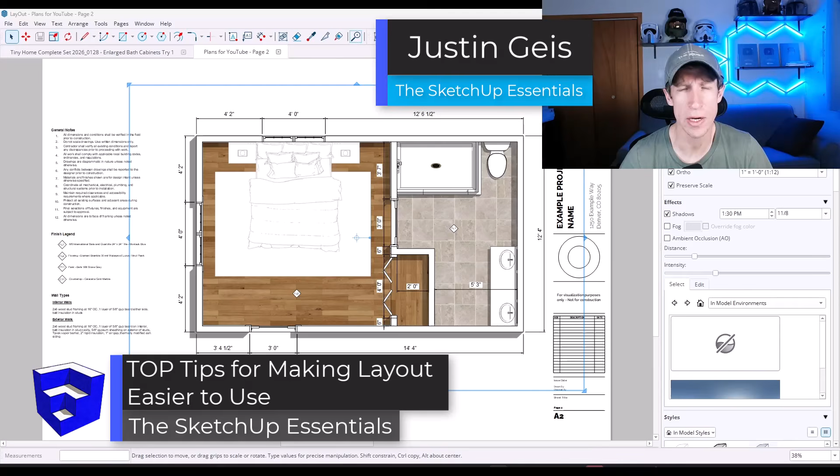So in today's video, we're going to talk through 10 tips that can make working in layout much easier. Let's go ahead and just jump into it. First off, I apologize if I sound a little bad today. I'm a little bit under the weather, but not bad enough to not make this video. So let's go ahead and get started.

Tip number one when you're working in layout is I highly recommend that you lock your viewport layers. What that means is you should be organizing all of your stuff in the model by putting it on different layers, and you should have them set up where you can toggle those things on and off. So I've got my dimensions on a layer, I've got my title block on a layer, and I've got my viewports on a layer.

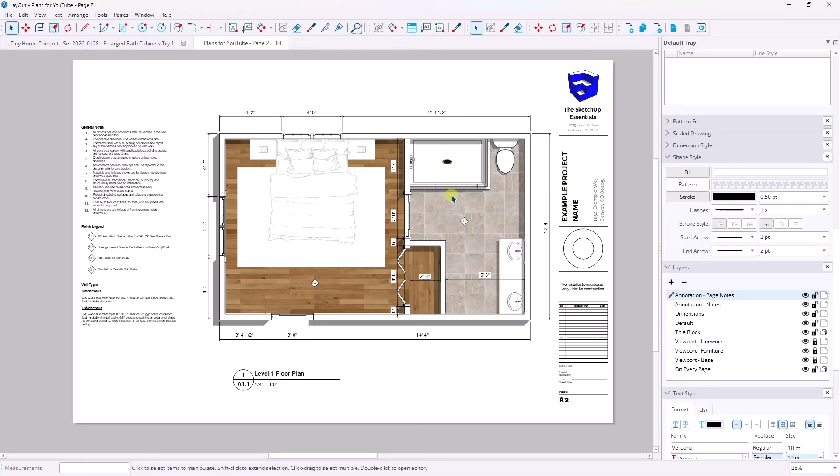In this case, I have multiple layers, but one of the things that I find frustrating is it's really easy to accidentally pick up a layer and move it around, which can mess up the alignment of your whole plan set. So what I like to do is make sure my viewport is set on a layer and then click on the lock button when I'm not using it. Now that it's locked, I can't accidentally pick this up and move it around because these are on a layer that's locked and you can't edit them anymore. So I highly recommend locking those layers once you get them set up so that your plans aren't moving around.

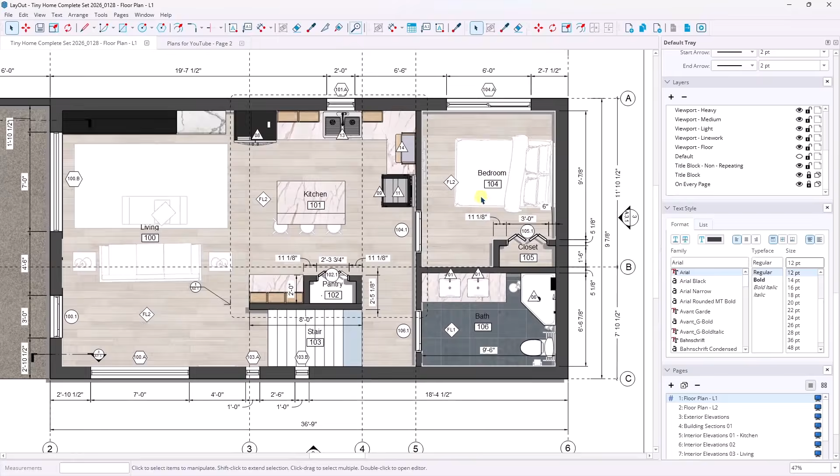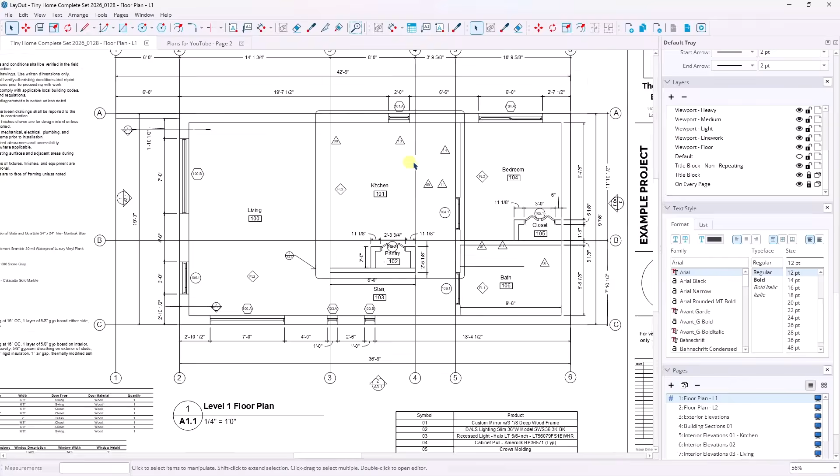Tip 2 is your plans can get really slow moving around in your viewport, especially if you have a whole bunch of stuff in them. So one of the things I recommend is if you go up into Window, Preferences, under Performance, there's an option for Draft Mode. What that's going to do is take your SketchUp model, and I'm going to leave it on always on. You could do it on pan and zoom as well. But always on is basically going to take your model and only display the vector edges and other lightweight things in your model. So notice how now, if I'm doing things like dimensioning, it's only showing my lines and edges in here, and it's doing it in a really fast, responsive way.

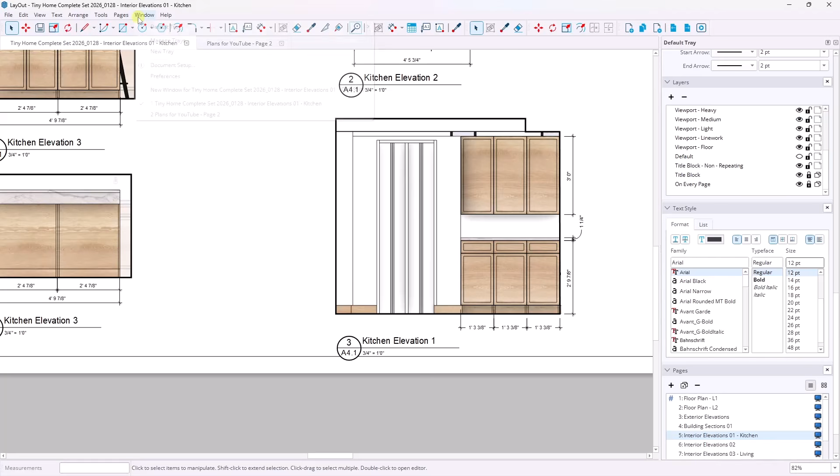You can also go into the settings under preferences and set this where it's pan and zoom only. Instead of trying to redraw over and over again, this is going to have a little bit of a pause before it redraws things in your viewport. That means you can move around in here without having that slow redrawing over and over again, especially if you have a heavy model. So draft mode is a fast, easy way to speed up your performance when you're inside of layout in order to do things like add dimensions without having to sit and wait for the engine to speed up.

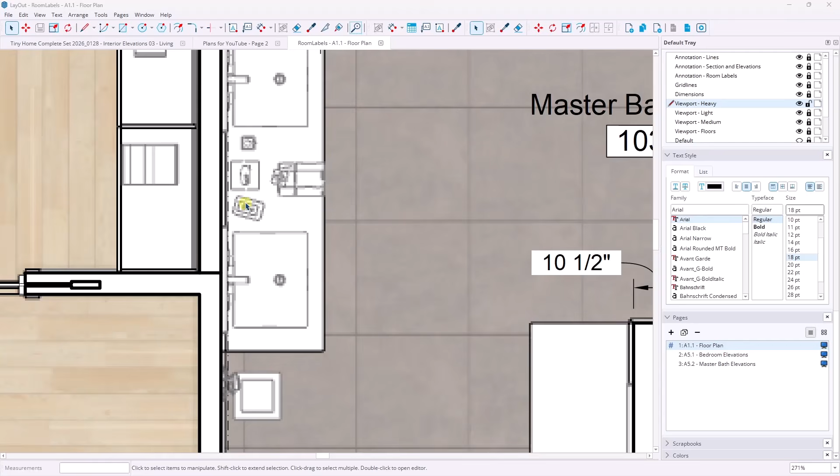Tip 3 is actually a reminder, something I forgot about for a while as well. When you export your drawings, your raster viewports are going to show up better in the export than they do in your layout viewport. For example, I've got some accessories on the table in this plan set, but you can't really tell what they are in layout. If I zoom in, they're very pixelated, they don't look very good.

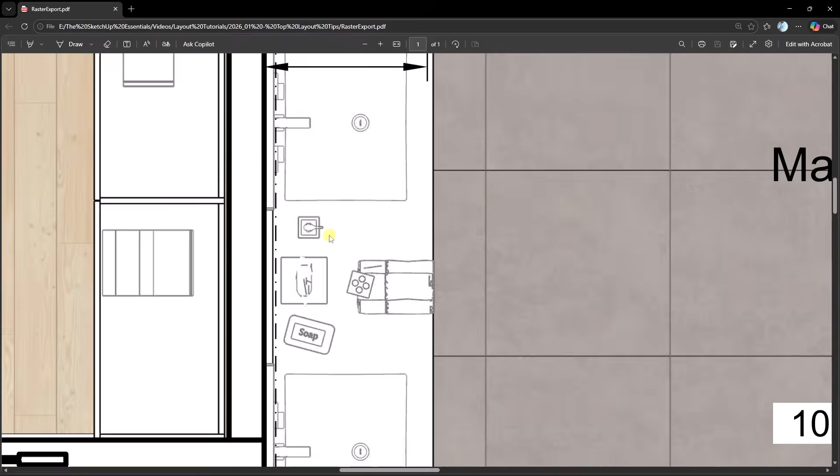However, I went ahead and exported this to a PDF, and notice how this line work actually came out fairly smooth. So just note that sometimes if something doesn't look good in layout, it doesn't mean it's not going to look good in your actual export. Try exporting it and see what your line work looks like on your raster items, because a lot of the time in the actual export, they're going to look better than what they show up as in layout.

Okay, and while we're on this page, this is something I talk about a lot in the course, so if you want instruction on how to actually do this, check out the Plan Essentials at SketchUpEssentials.com/PlanEssentials. One of the things I highly recommend is mixing a vector viewport with raster viewports.

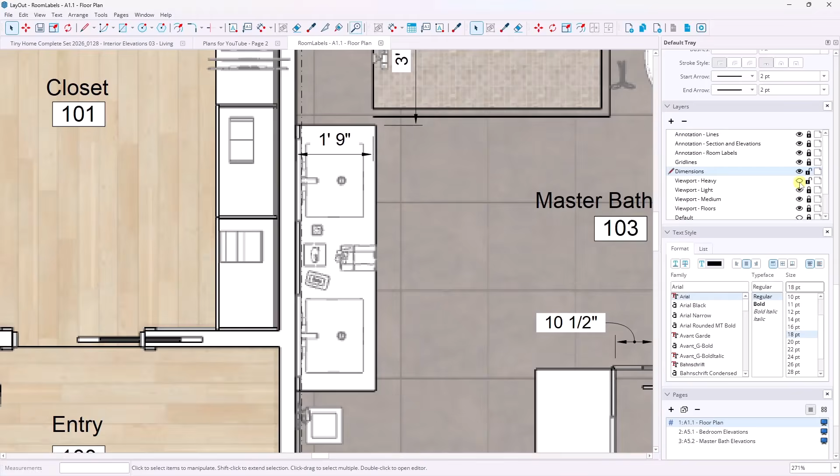In this case, what I've done is I've stacked a line work viewport on here that I can render as vector, and then I've got my other stuff in here as raster. That allows me to have this nice, crisp line work on things like the walls that need to be crisp for dimensioning and other things. But I've also got the other things in my model, and I can have heavier models in here without having to worry about the performance.

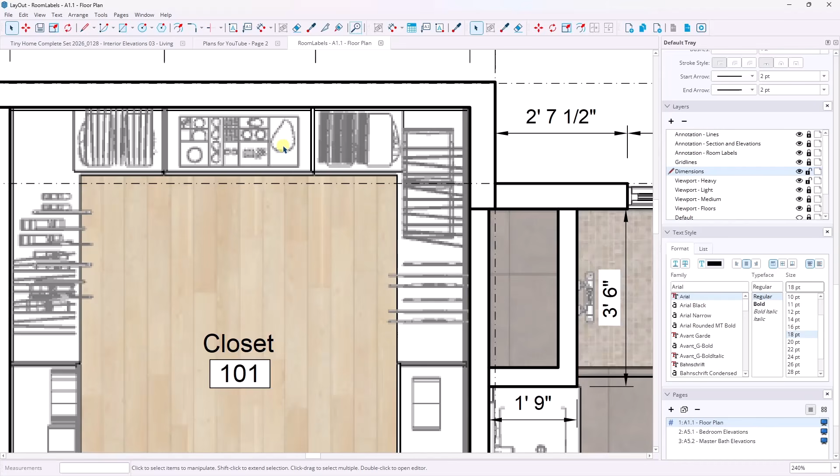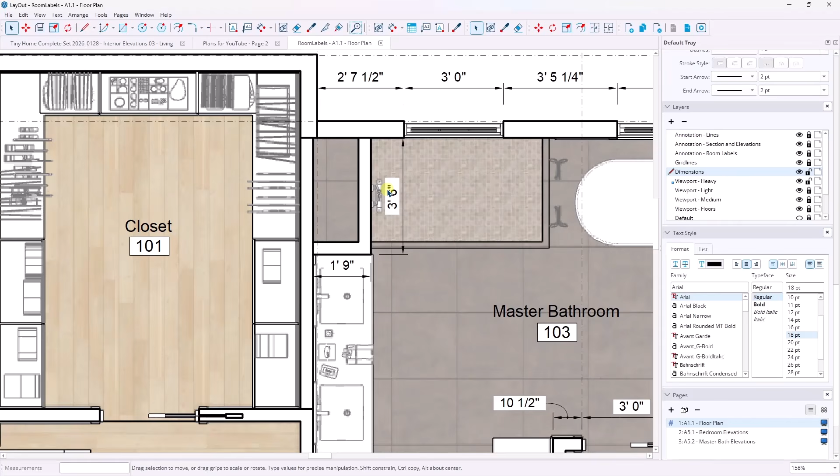Because if I was to take this geometry in here, like the stuff in the closet, and try to vector or hybrid render it, it would run so slow that it would take forever to run properly. So if you just render a lightweight line work layer and have everything else in here as raster, you're going to have significantly better performance than if you just tried to put everything on a hybrid layer or something like that.

Okay, next up is something I think was added in Layout 2025, I'm not 100% sure, but previously there was no move tool in the way we have a move tool in SketchUp. It didn't work the same way - what you would do is click and drag something, then you could tap the control key, but it was very click-and-drag oriented.

Well, now the move tool works the same way as the move tool in SketchUp. The cool thing is I can select an object, tap the M key, and that gives me an inference point. That inference point was hard to pick up previously, but now I can single click, move my mouse, tap the control key and click again. Then I can type in *3 and hit enter, and create an array exactly the same way I could in SketchUp. So it's now much easier to create equally spaced copies of objects inside of layout using the move function.

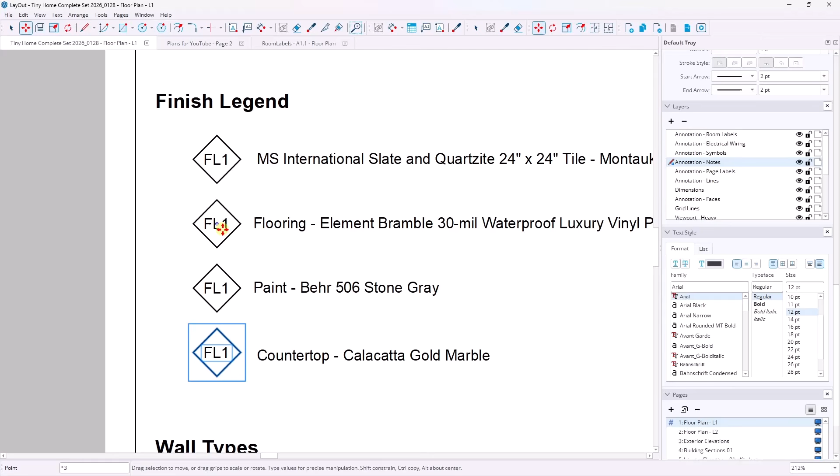Okay, so next up is using scrapbooks. Scrapbooks are basically a layout file that allows you to save things so you can drag them into future models later. This is literally just another layout file that you save in your scrapbooks folder, and then you have access to it inside of your plan set.

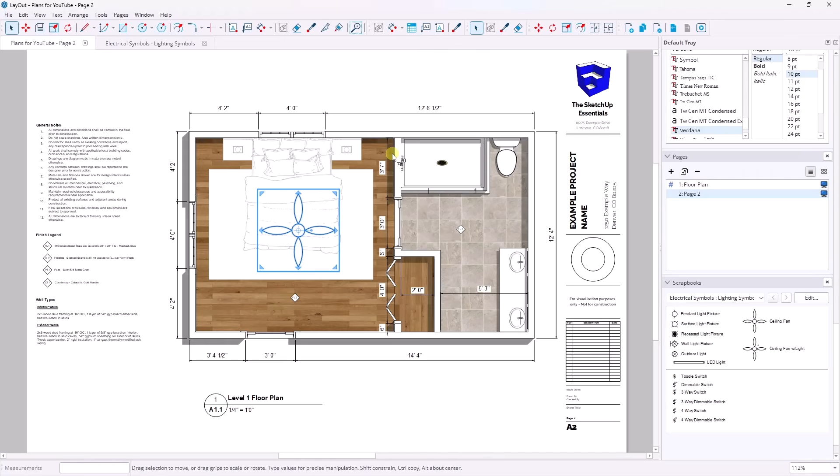So say I wanted to add a ceiling fan symbol in here - I can just click and drag it outside of that file, then resize it and place it where I need it to be. I've also got access to things like my pendant light fixtures, so I can just click and drag these onto my wall without having to redraw them over and over again. I highly recommend for any elements you're repeating over and over, including things like your notes, that you save them as a scrapbook so you have quick access to them later.

Okay, so next up, when you're creating tables, I would recommend, instead of creating your tables directly inside of layout, doing them inside of an Excel file. The reason is because Excel is much better for data entry - it allows you to create things like these schedules right here. Let's say we were to update the quantities in this schedule - Excel is way easier to use than table editing inside of layout.

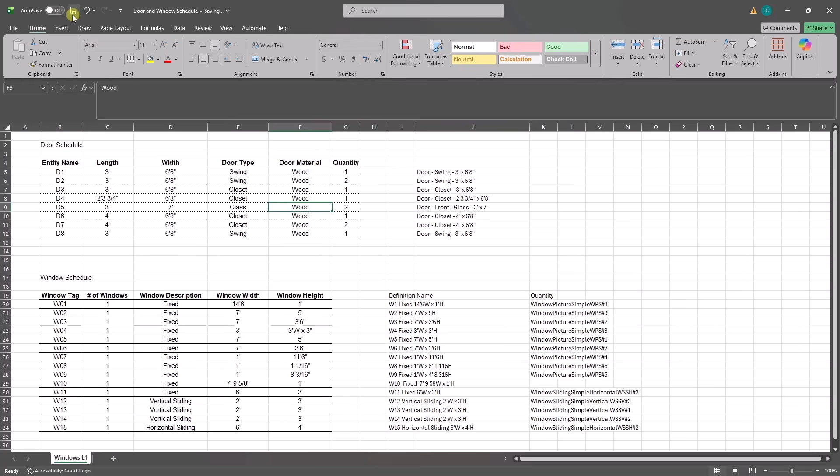And what you can do is insert a viewport that's linked back to this Excel file in the same way. For example, notice how if I update my table reference, it looks like it did it automatically, which will happen sometimes when the table is actually open.

Notice how your quantities will change whenever you update that model reference or table reference, the same way that you link back to a plan file in SketchUp. So I highly recommend that you use an Excel file for your schedules and then import that.

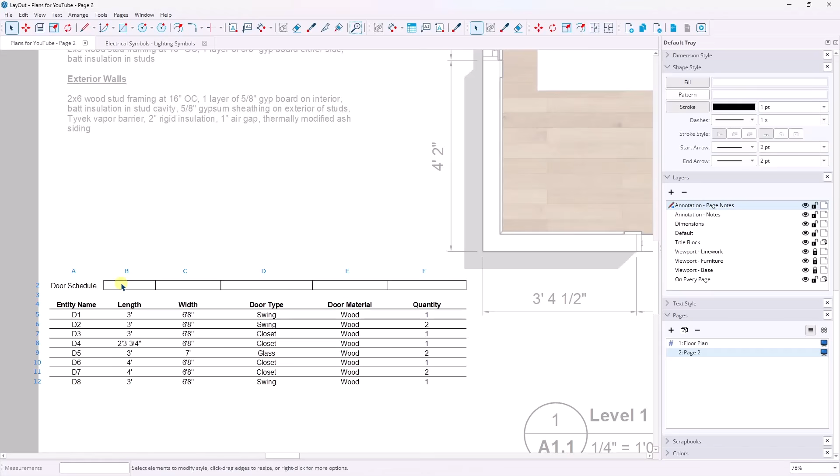You can edit things like these boxes right here, so you can edit the formatting in here. The text formatting and stuff will actually come over from Excel, so you can do a lot of that text formatting and the justification and things like that. Then you can use the shape style in order to adjust the stroke and add lines in here inside of Layout itself.

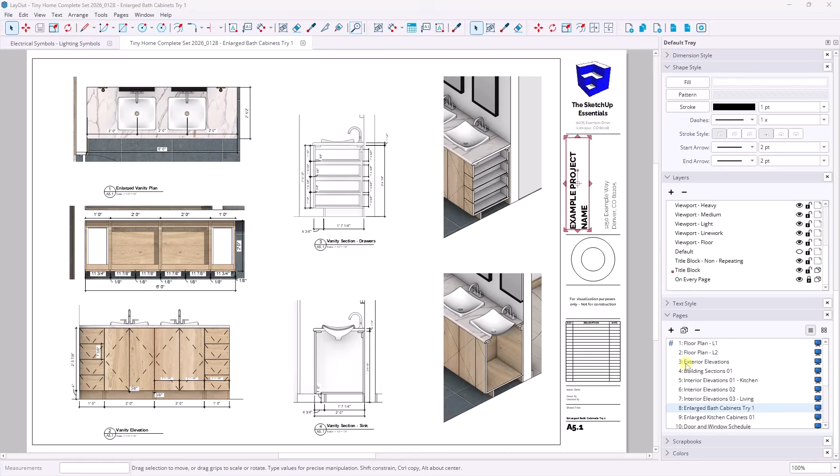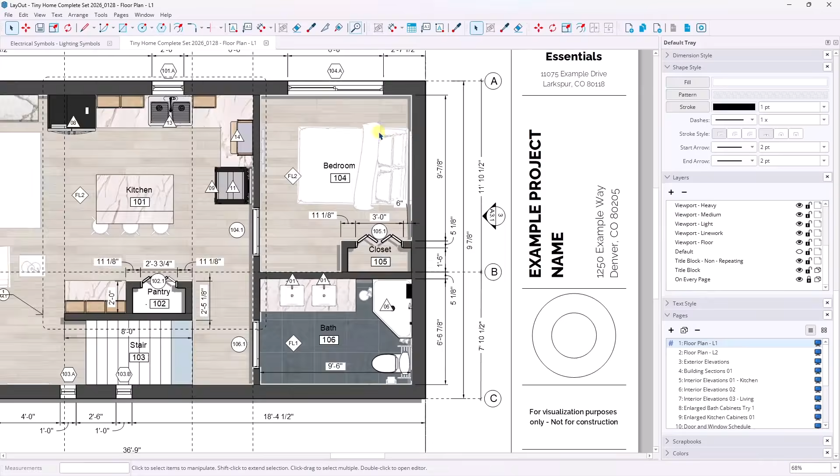Next up is something that you're going to want if you have repeating elements across a project. Over on the right-hand side, notice how you have a little sheet of paper. If you click on it, that's going to change this to a repeating layer, which means it's going to repeat on every single page of your plan set. So in this case, let's say I wanted to add a note in here, like revision 1.

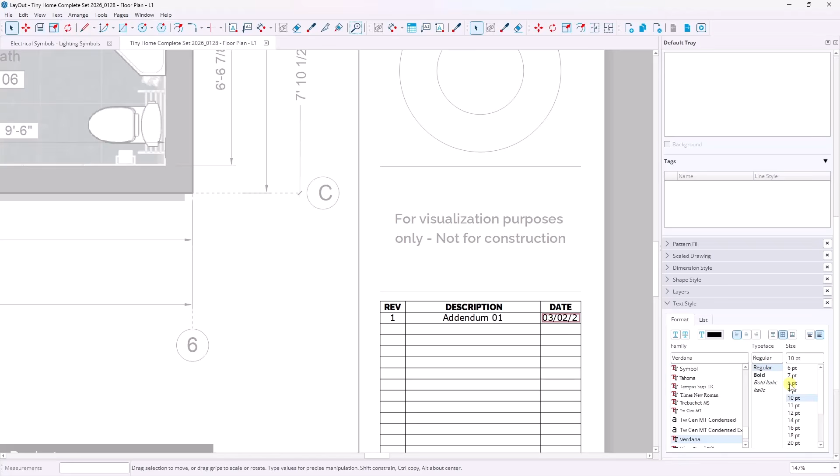We'll go ahead and center it. We'll call it addendum 1 right here. We'll add a date, 03/02/26, and I might need to make that font a little smaller to make it all fit. But notice how this is red because this item is on the title block repeating page, which means that because I've added that on a repeating tag, it's going to show up on every single page in the model.

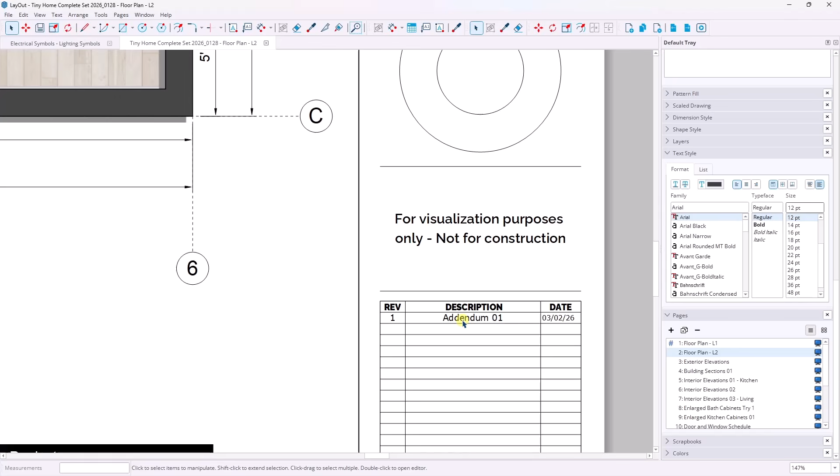So for repeating elements like that, instead of copy pasting this over and over again, you just put them on a repeating tag and you only have to add them once.

Next up, say you only want to show a certain portion of a viewport. So say I bring this viewport in, but I really only want to focus on the cut that I've taken across this cabinet right here. What I can do is draw a shape over top of it, so in this case I'm going to draw a rectangle right here. The rectangle has a pattern on the inside of it, which I don't really want, but it doesn't matter.

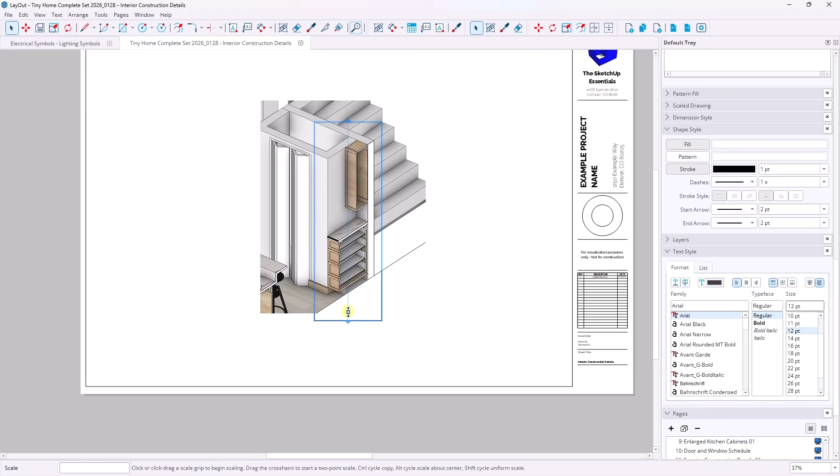I can select that rectangle, resize it a little bit, then select the viewport, right click, and create a clipping mask. What a clipping mask does is it clips out everything that isn't contained inside of the shape. So you can bring in a larger viewport and then clip out smaller pieces of it to use in your plan sheet using the clipping mask.

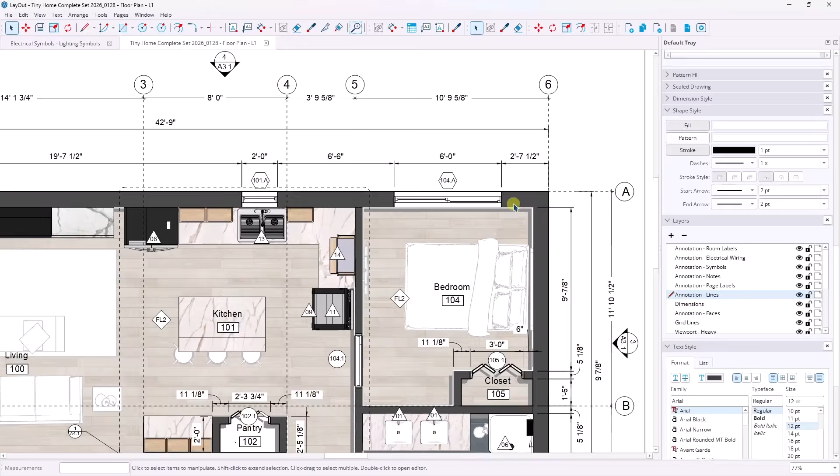All elements should be on their own layers. For example, all of my dimensions on this project are on the dimensions layer. That means A, I can toggle them off whenever I want, but B, there's a very powerful tool where you can right click and select all of the entities. If I right click and click select entities, that's going to select every single object that's on that particular layer, and because those are all selected, I can edit and adjust them all at once.

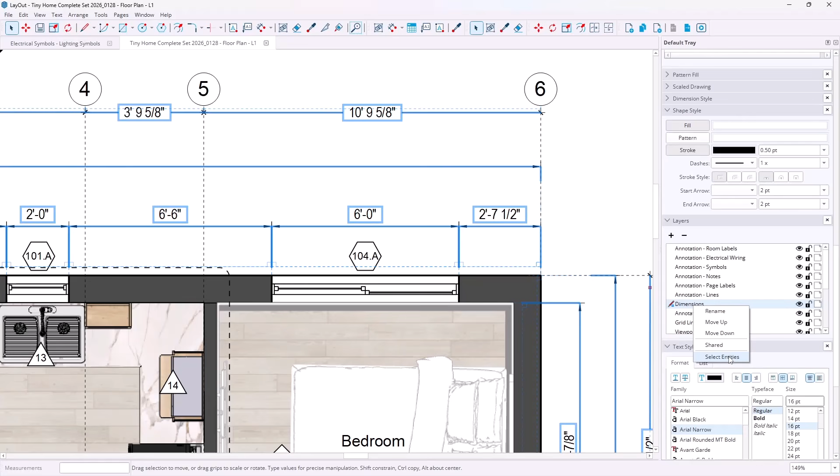So say I wanted to change the font to Arial Black or Arial Narrow or something like that. Instead of manually doing that for every single one of these objects, I can just right click, select everything on that layer, and make that adjustment. Plus it gives me the ability to lock the elements when I'm not using them so they're not moving around on me. It's a huge time saver to organize your layout file as you go so you're not having to go back through and pick up things one at a time later.

All right, so those should save you some time in Layout.